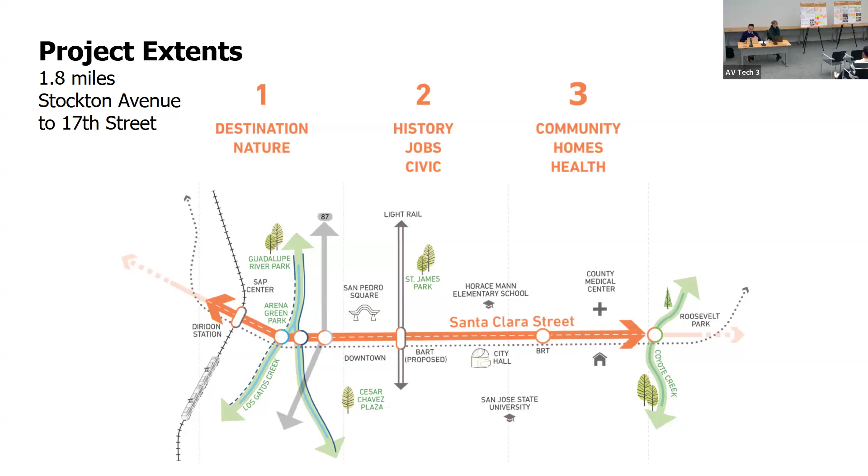And then in the east, we have somewhat lower density residential and business beginning just east of here at City Hall. In terms of the process, we started this project a little over a year ago.

We've spoken with many of you. We did existing conditions work on existing transportation assets. And we've been working, I'd say beginning this summer, at looking at different alternatives, starting just with concepts for the street as a whole. And now tonight we're showing you some complete packages.

Julie will tell you more. These aren't intended as final proposals, one or two, but to help you think through what's the best combination of elements for the street. With this feedback tonight, we're going to refine an option and move toward one option that we'll bring back to you early next year.

I think I've already touched on this somewhat, but as I said, this is a multidisciplinary project. So mobility is a given. The street doesn't work very well. We often say it's trying to do too many things and doesn't do any of them very well. That said, it does need to improve mobility. It needs to be easier to get around, and it has to be a more organized street.

But it shouldn't do that at the expense of the economy, which means it needs to be a great place for people to spend time. And it's often a tension right there. You can't have great cafes beside a freeway, it's just not pleasant. So there's this relationship between vehicle speed and how pleasant the environment is.

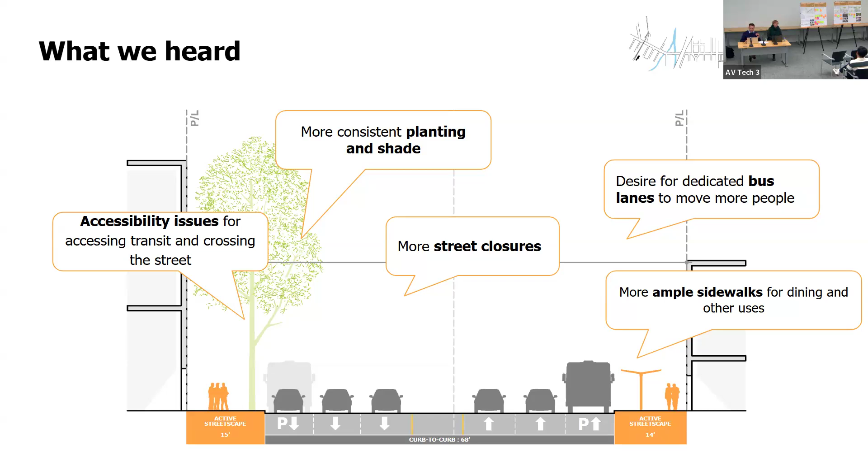People want the street to work better, to make it easier to close for special events. We've seen a lot of those. There's a desire for dedicated bus lanes, or at least ways to move the buses more quickly. And then a really strong one is, to the point I've been making about how the street needs to welcome people, a place to be, wider sidewalks for dining, as well as just to reduce the clutter on the sidewalk.

So these are some fundamental things that we are looking to do across the corridor based on the feedback we've received. So generally, we want to reallocate some of the vehicle space to walking and transit. And we're doing that in part by taking over largely space in the curb lane. Also, in many cases, dedicated left turn pockets, so we would restrict left turn movements in some cases.

We're looking at the street as we want to make it vital for really 18 hours of the day, maybe not 2 a.m., but 18 hours of the day probably, and to think about that. So in our design, can we accommodate those various activities? As I've already mentioned, fill in gaps in the tree canopy, and include accessible design features.

And then this is really important. This is not something that Julie and her team are going to fully design. We're going to come up with a 10% street design plan as a result of this effort. But another big piece of feedback we've gotten is that there are bright spots along the street. Jess mentioned this a bit. But then there are sort of less active spots between them. So how can we maintain visual interest along the corridor?

So we've identified also a number of spots along the corridor that are existing assets, whether it's San Pedro Square here, or right close to there, the Almaden Triangle. We think that's a place that's sort of underutilized. Could we not do something great there and help draw people along the street, maintain their interest?

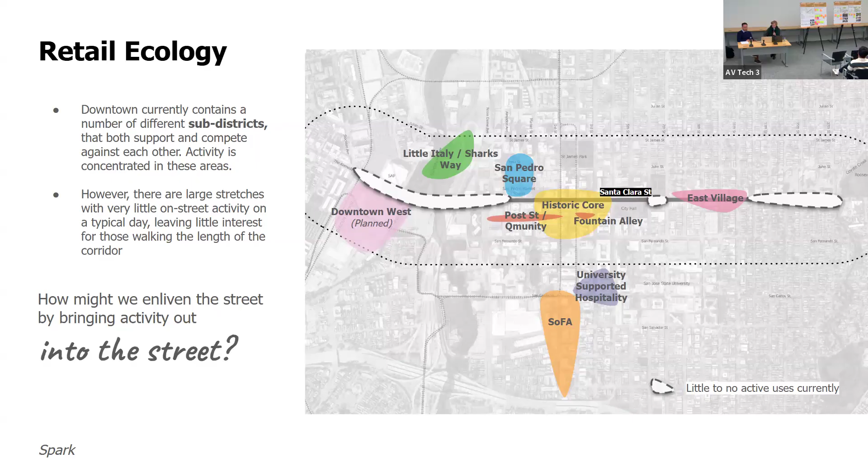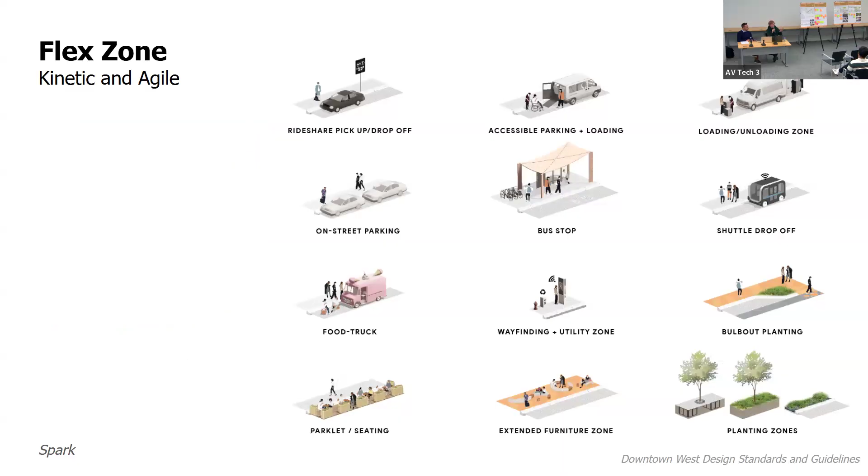I'll go through a couple of design elements that these flexible platforms can be made up of. We know there's an initiative already happening in San Jose for pre-approved parklets—still in process, but the goal is adjustable modular systems already approved, so businesses won't have to go through a permitting process each time.

These are things businesses would be able to choose off the shelf, so to speak, and adapt as needed. This helps ensure the curb isn't really a barrier but an extension of the businesses, and adjacent to those more fixed furnishings, we would have movable furnishings.

So we talked about this Spark concept being about adaptability. If you're having coffee with friends in the morning, you could gather movable seats around, and those same seats could support a potential event in the afternoon, or businesses could use them as cafe seating—really having furnishing and seating that can be used in different ways.

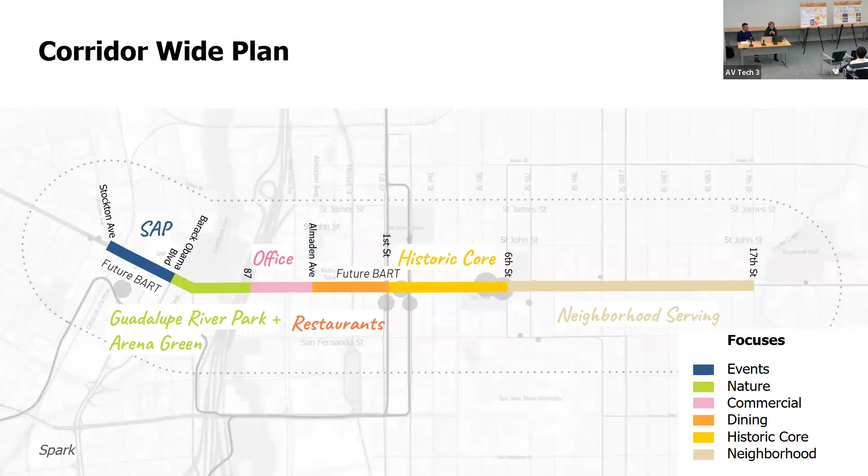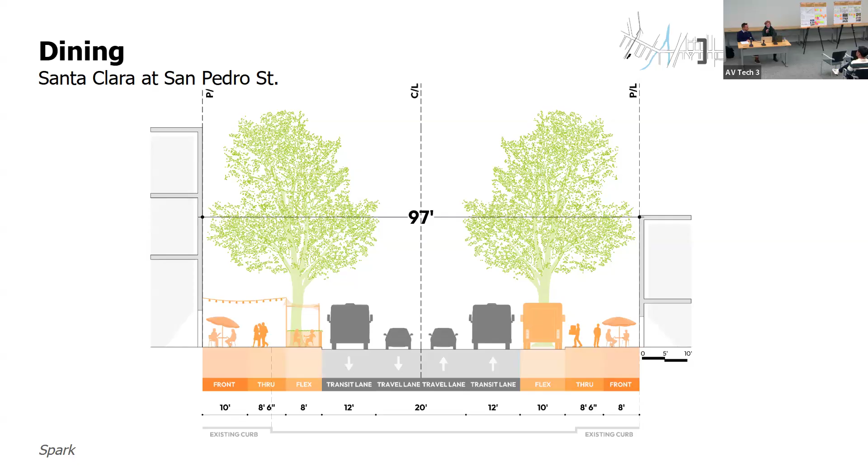Here's our section. Santa Clara Street is 97 feet wide. Currently, as you see on the bottom, there's the existing curb with about 16 feet of sidewalk on each side. What we're looking to do is increase the sidewalk zone into the street, moving the curb in, having dedicated travel lanes and transit lanes, and flex zones that sometimes would be a bus stop, sometimes an extension of a local business, and sometimes an area to plant a tree. Currently there are challenges planting trees adjacent to businesses because of basements and infrastructure underneath, so pulling the sidewalk out creates more opportunities for these types of activities.

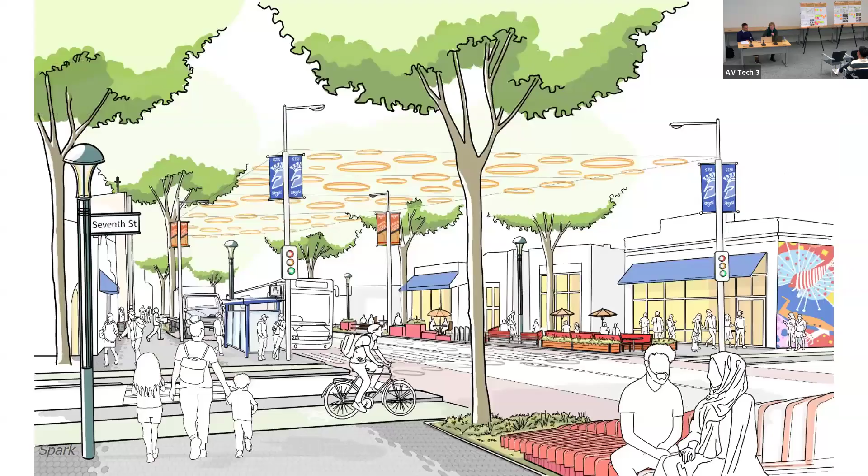This is 7th Street, which you're probably all familiar with. We've done a few vignettes taking the pieces we've already looked at to imagine this with added lighting, special furnishings, adaptable parklets, and potentially unique paving to bring you through.

That's a possibility for sure. It's a great point, I think it's something to consider for sure. Thank you.

Okay, so we're moving on to Mosaic. Mosaic is our concept rooted in history and culture and the celebration of what can be here in San Jose, celebrating the cultural communities of San Jose—bringing back everything from our indigenous tribes to the local immigrant community, and even the incredible murals throughout San Jose. How are we bringing those into celebration of the street and making pointed efforts to include them in these different schemes? And then also the lowrider culture—how are we bringing everybody down the street and celebrating that. There's much more, this is just a few examples.

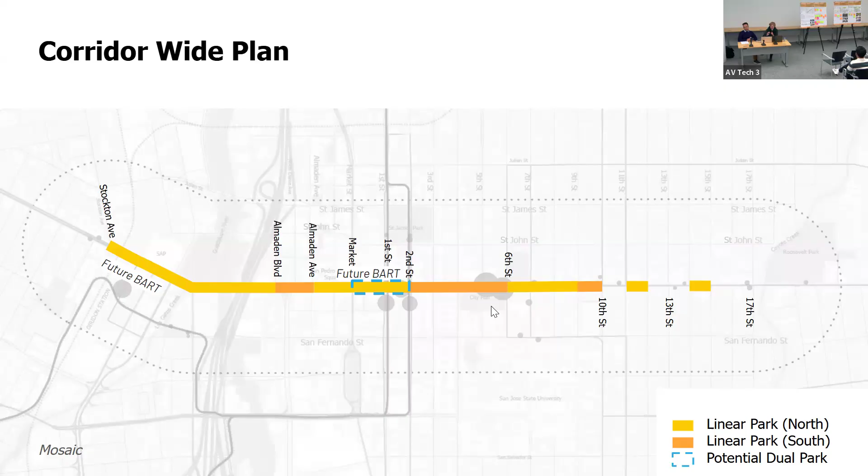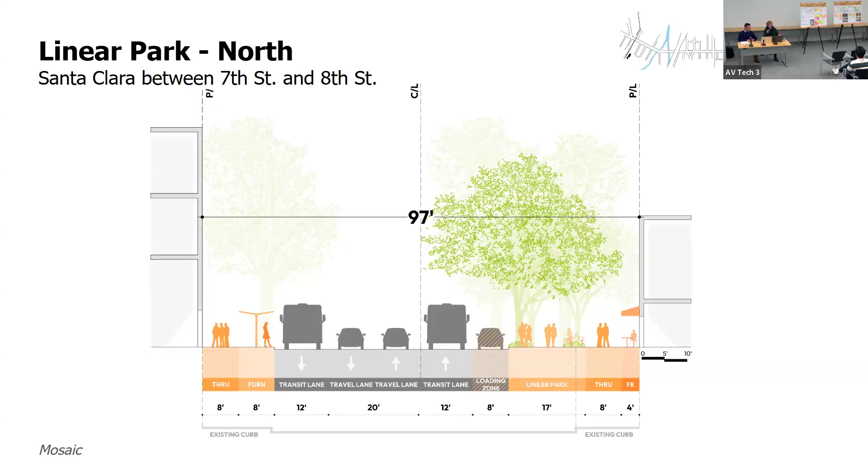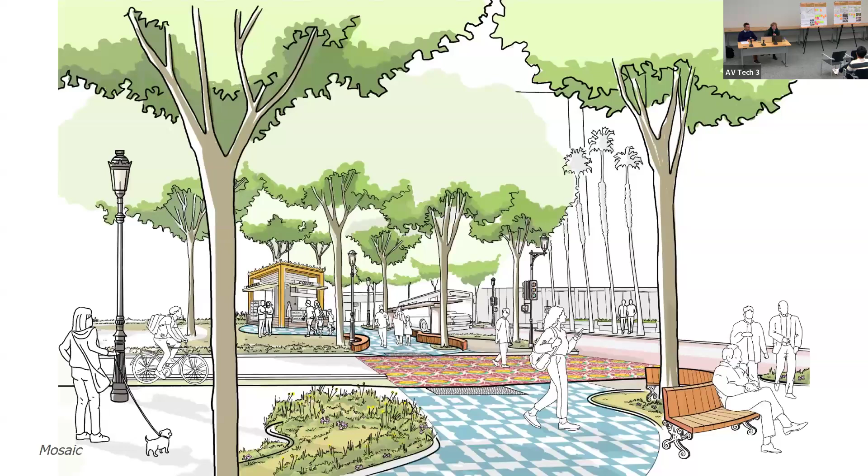Again, we have our section here, our 97 feet. You can see we're not decreasing the sidewalk at all on the side where there isn't the linear park, but we're really expanding it on the linear park side—giving ourselves almost 30 feet. We're expanding the existing curb there by almost 17 feet. And if you include the loading zone, which at times would be parking and loading and other times can be a continuation of the park—and again, we have the travel lane. The vignette we've done here is at Almaden, because we already have that green patch on the corner, so you can imagine extending that through the linear park, using color and texture for what that may be.

These are artist renderings—impressions, just for inspiration. So you can imagine not all these pieces would be exactly like this, but the idea is there's some great new textured, colored ground plane to represent the cultural communities, an interesting crosswalk, and some furnishings that would carry through. And really, if we have the linear park, can we bring some of these businesses that are inside outside? Can we add kiosks that are currently in the buildings, drawing people away from the street, and bring them into the street more? That's part of this idea as well.

So we're coming to the end of explaining the two schemes. I think most of you have probably seen these on the board, and I really encourage you, after a comment period, please come up and add some comments to our boards. We'd love to hear what stories you want to hear, what things you'd like to see pop up with Spark, and what scheme really resonates with you, with those in San Jose. At this point we're not looking to choose an exact scheme, as Eric mentioned early on. The idea with these two schemes is concentrating on the look and feel—what's going to make everyone here proud to be arriving on the street, so we can turn around the commentary that Santa Clara Street is the least favorite street in San Jose.

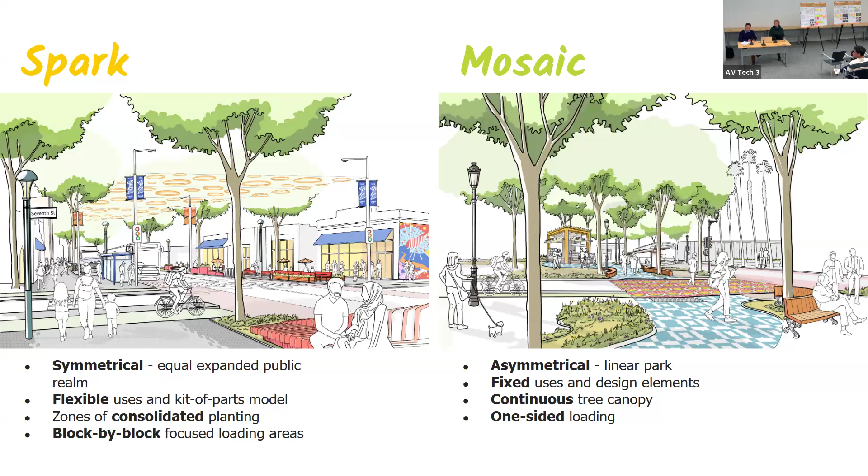I heard some comments tonight about how we should wait for development to come before we implement these types of initiatives. I think it's a good thing that we bring on some of these plans and tie that with development, because if we don't have that foot traffic, some of these businesses coming in with new developments may not have enough customers to even keep them alive and afloat. So I just wanted to remark on that and say how important it is that we continue this conversation, keep these plans in motion, and engage the community. I'm really excited about that effort.

From another perspective, in my work I see the tie-in with some of these plans and affordable housing, and how with different grant funding like AHSC, you can tie in different community initiatives in terms of bike pedestrian improvements, and then tie that in with the creation of affordable housing. So I don't know if you've considered AHSC as a funding source for future implementation rounds, but I would implore the panel to explore that.

Thank you so much for the work that you guys are doing. Thank you, yeah, thanks, great comment.

I think what you're alluding to is this first mover dilemma in terms of who's going to come there and how are they coming there. It's a chicken and egg situation, and what kind of development are we doing and how are we improving this? Each of these schemes would do that in different ways. But it's such an important point in how we're bringing energy to downtown and the streets. If we're creating it, do the businesses come, or are we depending on the businesses? I think both of these schemes do that in a different way, and it's a really good point.

Yeah, I'll just add, many chickens and eggs in this project. We work for the Department of Transportation, and I think you're right, we need to put forward a vision. We're not going to attract any funding unless we put forward a vision that we've articulated and spelled out, and provided a bit of a roadmap about how it can happen. But this goes to the question asked earlier about development - we don't control that, but we can provide a bit of a platform where maybe you see these photos here, maybe this starts to make it more appealing for one business to come in. And then hopefully there's a bit of a snowball effect. Sorry for the non-California analogy.